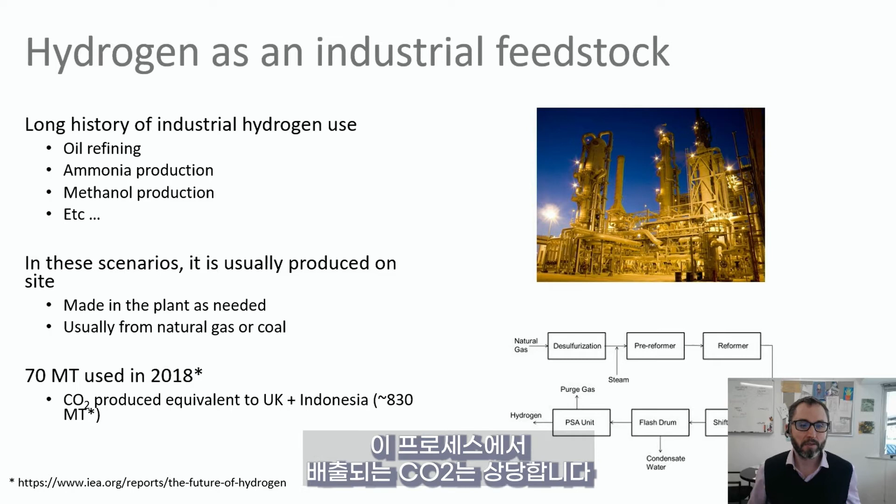Hydrogen has been used for 100 years or more as an industrial feedstock to produce ammonia, methanol, in the refining of oil. In those scenarios, it's produced at large scale, but usually inside the plant or the factory where it's used, and that's usually made from natural gas or coal, both of which, of course, are carbon-intensive processes, and the CO2 emissions from those processes are significant.

What's happened in the last few years is that there's been a real global shift in the desire for low emissions energy systems across transport, power, and industry sectors, and the realization that not every country has the renewable resources available to it to support the transition goals that they have in mind.

And so what we see is this notion of hydrogen as a renewable energy carrier, and the opportunity to produce that in countries like Australia, where there are plentiful renewable resources, and move that to countries who do not have those resources but can use it as part of their decarbonisation plans. And so we see a real market pull globally for clean and renewable hydrogen that we've never seen before.

What's also happened is that key technologies have matured to the point of commercial readiness, and as we'll see later on in this talk, are becoming competitive with incumbent technologies. We're also seeing advances in carriers and storage technologies, which hitherto have really been the limitation in widespread adoption of hydrogen systems. And of course, we're seeing an increasing acceptance of the use of energy alternatives across a range of sectors. And importantly, that's including governments at all levels.

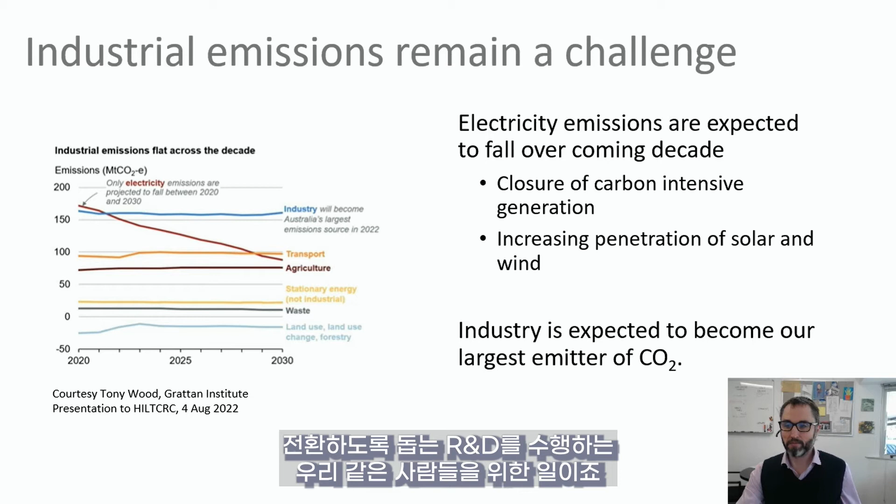What we see, however, is that other emitting sectors, and what's interesting for this presentation is the role of industry there, are not decreasing, and it's expected that next year sometime industry will become Australia's largest emissions source, and that's a job for people like us who do R&D to try and help different sectors transition to low carbon alternatives.

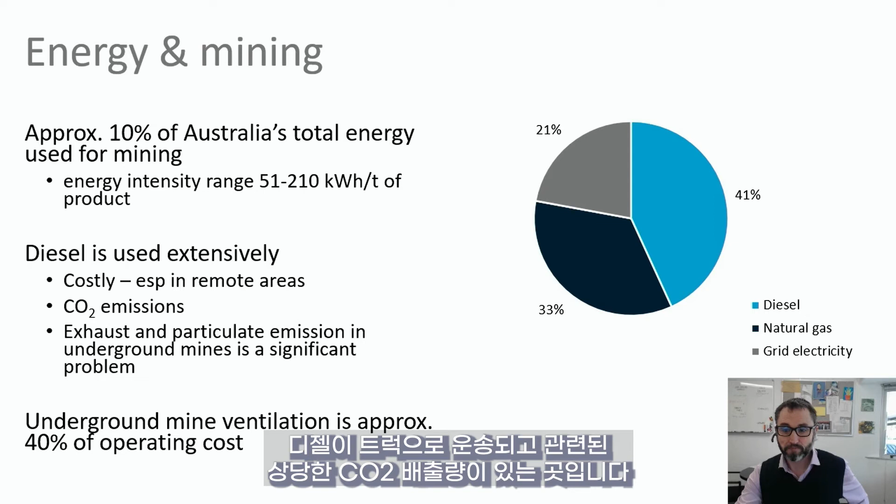Energy and mining, of course, is a space where there is lots of movement from a hydrogen perspective. That's mainly because of its reliance on quite expensive diesel, and this is especially the case in remote areas where that diesel is trucked in and has significant CO2 emissions associated with it. And because of that, we see some of the early movement in some of the demonstrations in this space around trying to see if we can decarbonise operations.

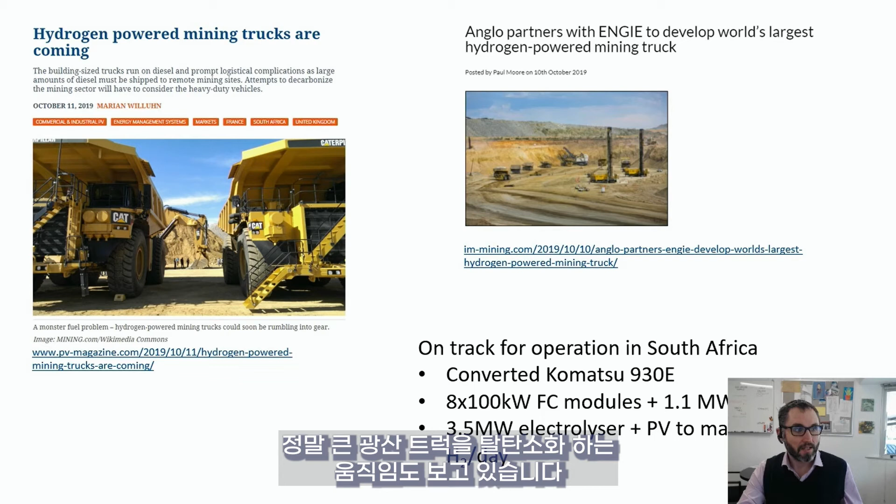Our colleagues at Fortescue in Australia here are active in looking at hydrogen-powered light vehicles, and of course we're seeing some movement around the world in decarbonising the really large mining trucks that support so many of these operations.

It's not just about transport, though, and this is an example I use quite a lot. This is a Canadian example whereby we can use hydrogen in partnership with batteries and flywheels to really support quite an effective energy storage system. So this is a 30-ish megawatt microgrid in Canada at a mine. They've installed two 3 megawatt wind turbines there and coupled that with a storage system.

And that really does highlight to me how it doesn't have to be batteries or hydrogen or other. There is really a role here for different technologies to play to their strength and support energy storage over the short and medium and long term to reduce the reliance on carbon-intensive fuels.

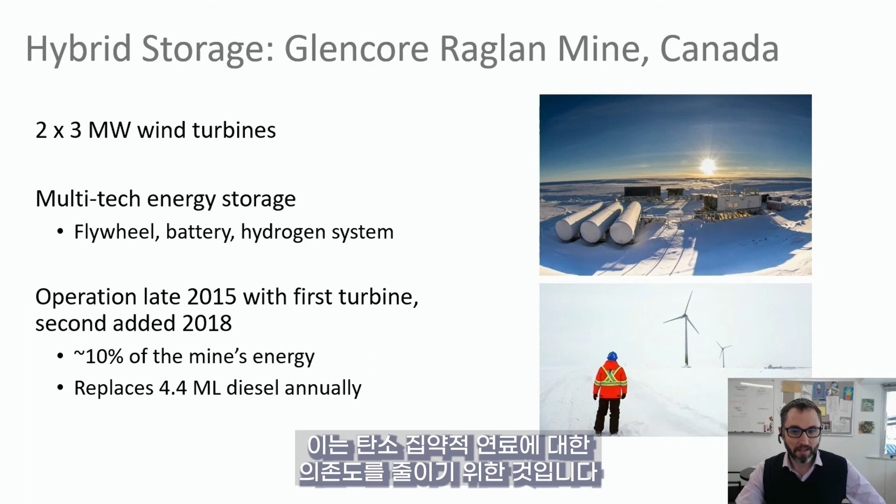And I think when we're talking about hydrogen in industry and decarbonisation, people's minds go to steel making pretty quickly, and there's a whole bunch of angles here. I think there's the opportunity for hydrogen to be used in the beneficiation processes, which have flow-on effects to efficiency of the steel making processes. We can't decarbonise a blast furnace completely. I think the structural properties of coke are so important there.

However, we can, and we've seen it in Europe in the last year or two, use hydrogen to partially offset some coal use. And I think that's in particular when we're looking at creating heat down the bottom of the blast furnace. And given the number of blast furnaces around the world and the time frame that we expect them to be running for, by increasing the quality of the feed to those blast furnaces and partially replacing some of that coal, there's really an opportunity for quite significant emissions reduction.

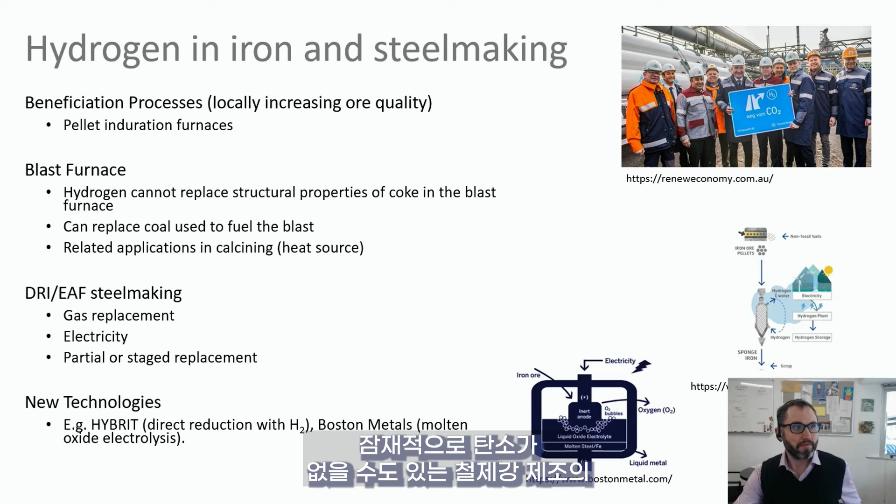A lot of the visionary thinking in this space, however, is about new pathways which are much more reliant on electricity. And of course, by using renewable electricity, that really does remove carbon from the process. They require perhaps a pre-treatment step, a direct reduction step, and hydrogen has a really good role to play there because, as well as being an energy source, of course, it is a reductant. And I think there's significant opportunities for new pathways in iron and steel making, which can be potentially carbon-free.

And so where does this take us from a hydrogen and an R&D perspective? In Australia, we have a new CRC. The CRCs are cooperative research centres. They're partially funded by the federal government's CRC scheme, but have significant contributions from industry and research. And they bring together the industry and the researchers to really target big challenges.

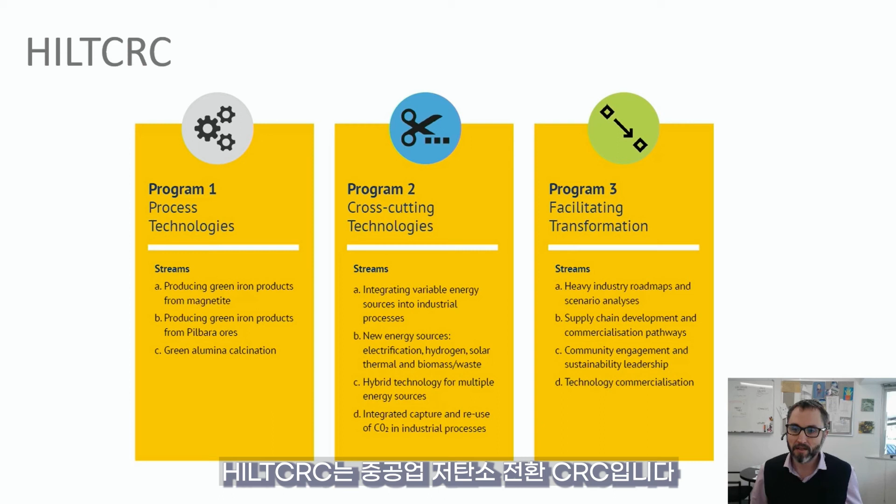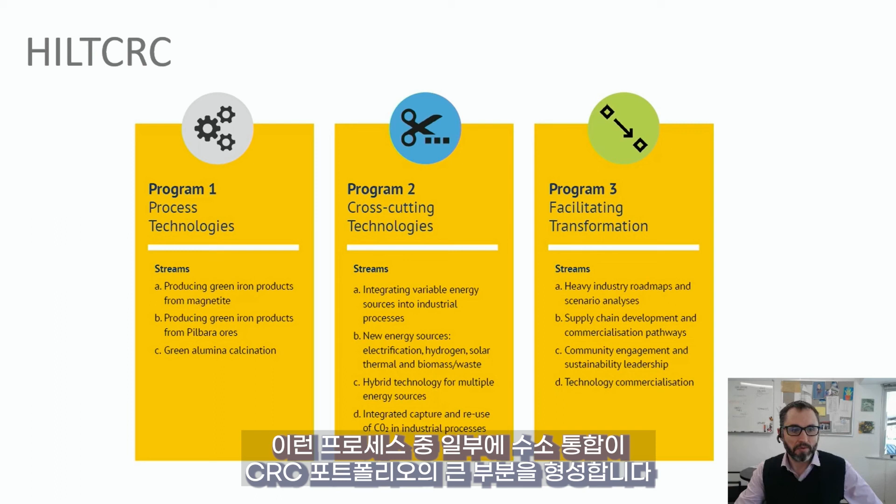And the HILT CRC is the Heavy Industry Low Carbon Transition CRC, and its focus is very much on decarbonising some of those heavy industry sectors around iron, steel, alumina, cement, and so on. It began last year, and we're now well and truly underway with that research program. And hydrogen integration into some of those processes forms a big part of the CRC's portfolio. And CSIRO, of course, is playing an important role there.

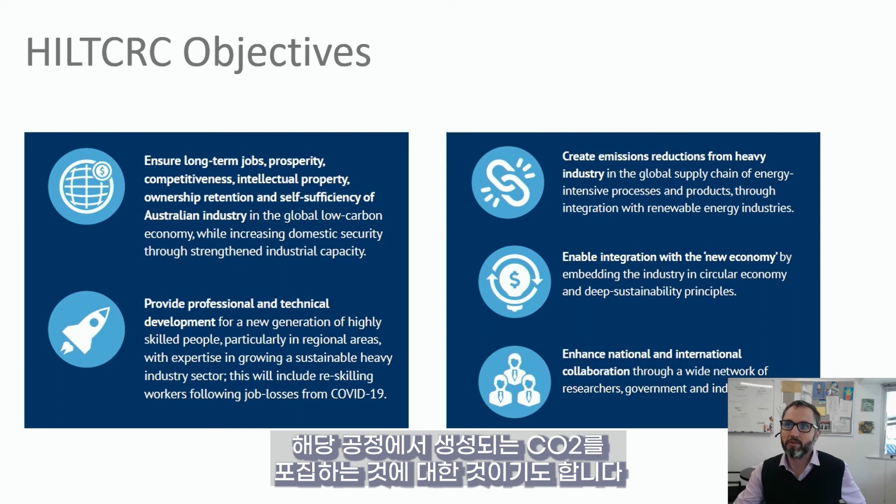So this is about long-term prospects for the heavy industry sector. It's about reducing the emissions from those sectors, both by looking at where their energy comes from, but also by looking to capture the CO2 that's produced from those processes. Because in some of the processes, if we're converting calcium carbonate through to calcium oxide, for example, that CO2 emission is not due to the energy, it's part of the process. And so CO2 capture perhaps is one of the only pathways that we have available to us to decarbonise.

And so, again, hydrogen is not going to be the silver bullet here. Hydrogen is part of the solution. So by using hydrogen pathways in concert with solar thermal, bioenergy, CO2 capture, and of course widespread electrification, we really do have the opportunity to decarbonise these heavy industry sectors and allow them to prosper in Australia.

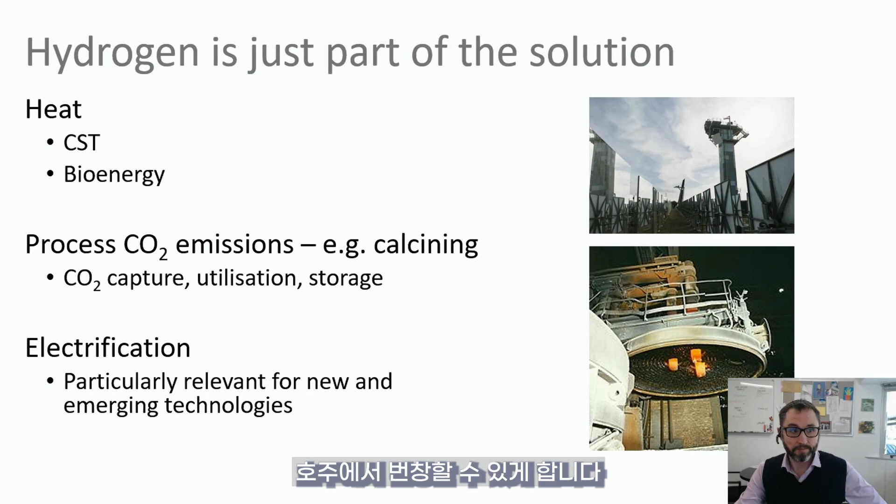There is, however, plenty of work to do, and whenever we're talking about hydrogen and industrial applications, we think about getting the costs of that clean hydrogen down, and of course the scale of its production up. Matching the supply and the demand scenarios there is important. I think we haven't quite got the balance of that right yet, and as we see more and more demand side projects emerge, I think that's going to really drive the demonstration and scale up of this industry.

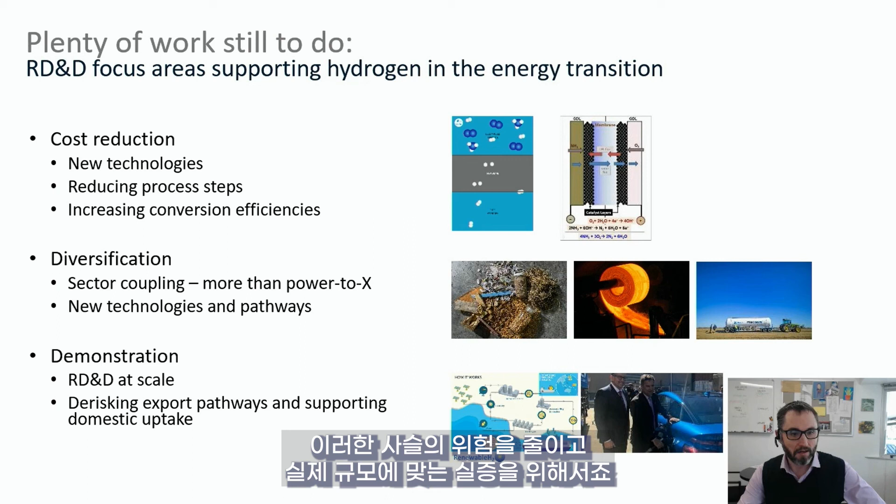Diversification is also important. We talk a lot about sector coupling when we talk about hydrogen, and that reflects the fact that we can now bring together industrial sectors such as the heavy industry sector, which I've spoken about, transport, agriculture, mining, and of course electricity in ways that we haven't brought together before. And what that does is it supports scale, it supports widespread decarbonisation, but it does need key technologies across those value chains, and it needs organisations like CSIRO to work with our industry partners to de-risk those chains and really to demonstrate it at scale.